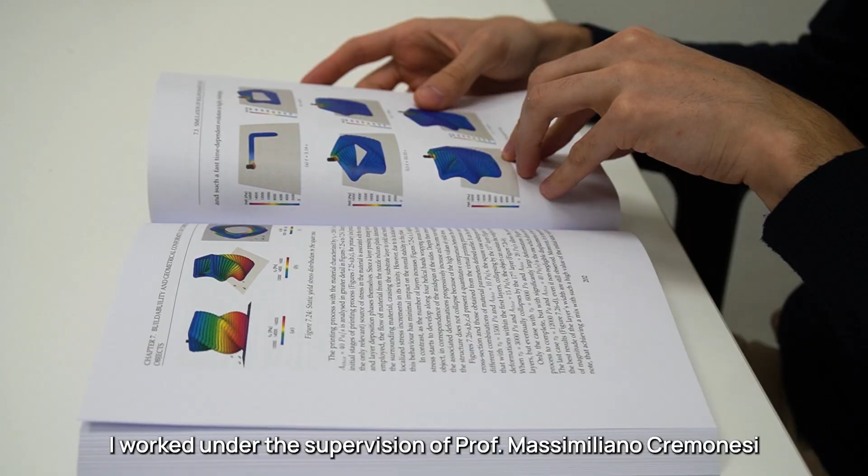Hello, I'm Giacomo Rizzieri and I recently obtained my PhD in structural, seismic and geotechnical engineering. During the past 3 years, I worked under the supervision of Professor Massimiliano Cremonesi and Professor Liberato Ferrara. My work lay at the intersection between computational mechanics and material modeling, and I've been working with both the research groups with the aim to develop new computational tools to simulate 3D printing with advanced materials.

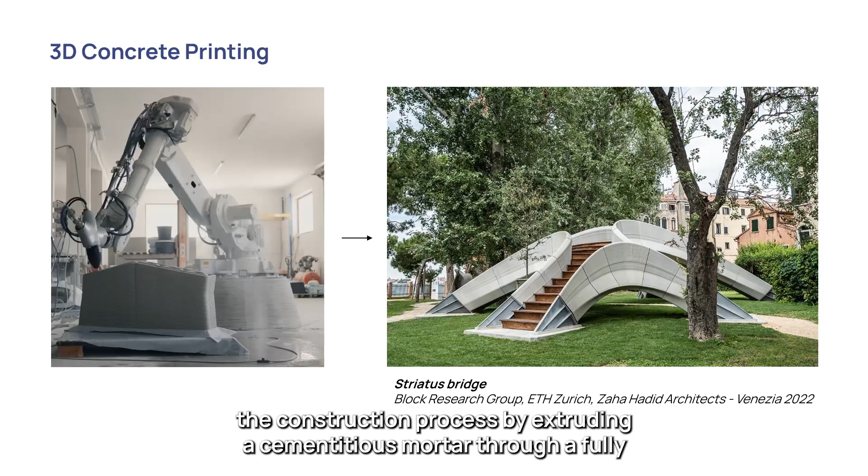Before entering into the details of my research, let me take a step back and explain to you what 3D concrete printing is. This is a very new technology which is used to optimize the construction process by extruding a cementitious mortar through a fully automated nozzle in order to create complex structures and objects. However, it is clear that this technology is very complex. For these reasons, it's necessary to develop adequate numerical and regulation tools to control it and optimize it.

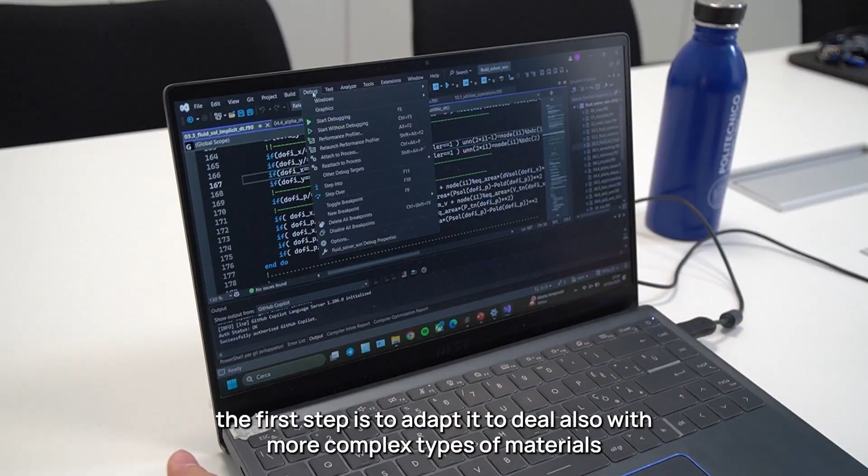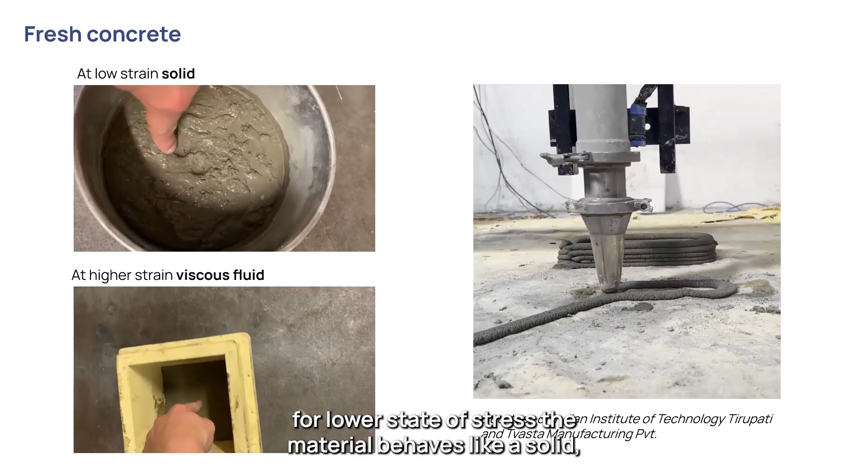In my research, I started from an already developed computational tool for fluid dynamics and I tried to extend it to simulate 3D concrete printing. The first step is to adapt it to deal also with more complex types of materials. In the case of fresh concrete, the behavior is dictated by the state of stress. For lower states of stress, the material behaves like a solid, while if it is subjected to vibrations, it will start to flow like a fluid.

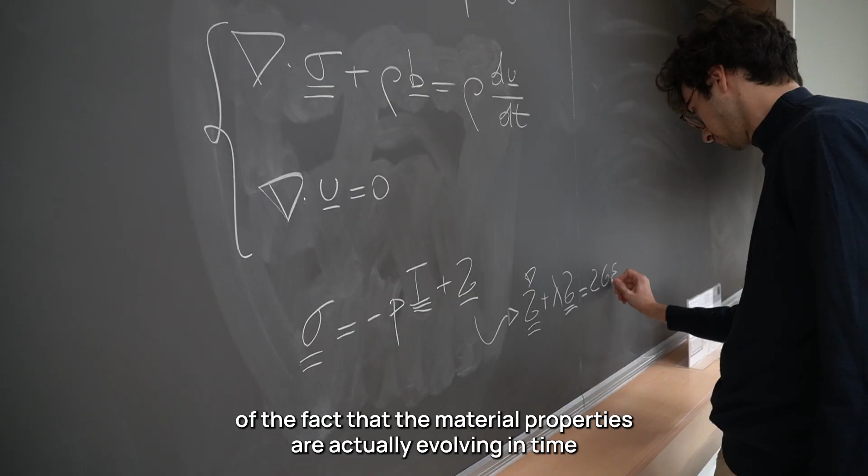Mathematically, this type of approach can be reproduced with the Bingham model. However, this is not the most accurate choice. In fact, the Bingham model is neglecting elasticity. For this reason, during my PhD, I tried to implement and develop also viscoelastic and elasto-viscoplastic materials. Additionally, I enhanced them, adding also the time dependency in order to take care of the fact that the material properties are actually evolving in time due to the hydration reaction of fresh concrete.

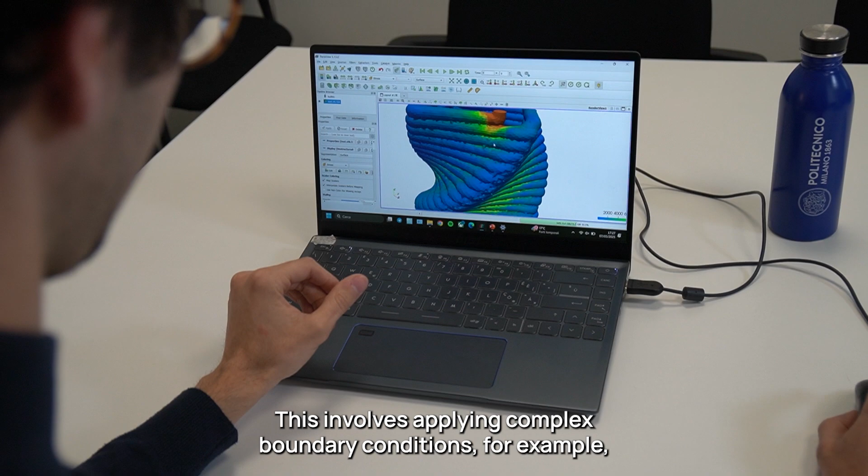In parallel, I started implementing a computational framework to represent the process of 3D printing from the numerical point of view. This involves applying complex boundary conditions, for example, to represent contact of the layer with the base plane or contact of multiple layers, one on top of the other. All this framework has been implemented in a Fortran environment and, combined with the material models I described before, is able to reproduce in a very accurate way the 3D printing process.

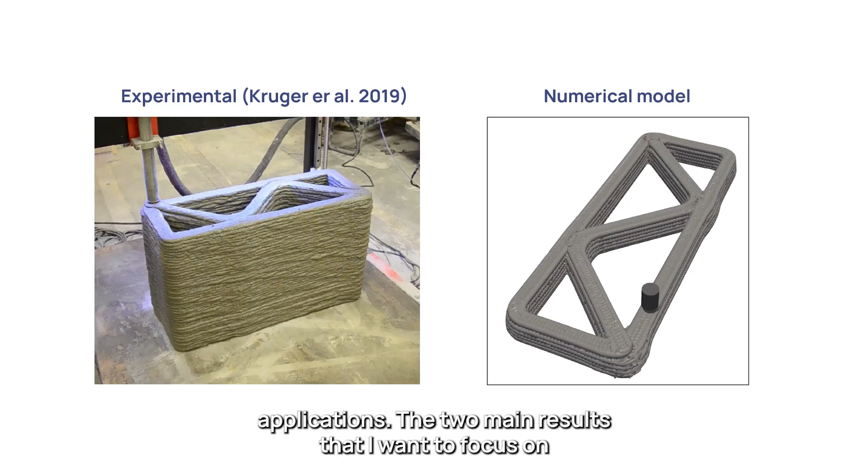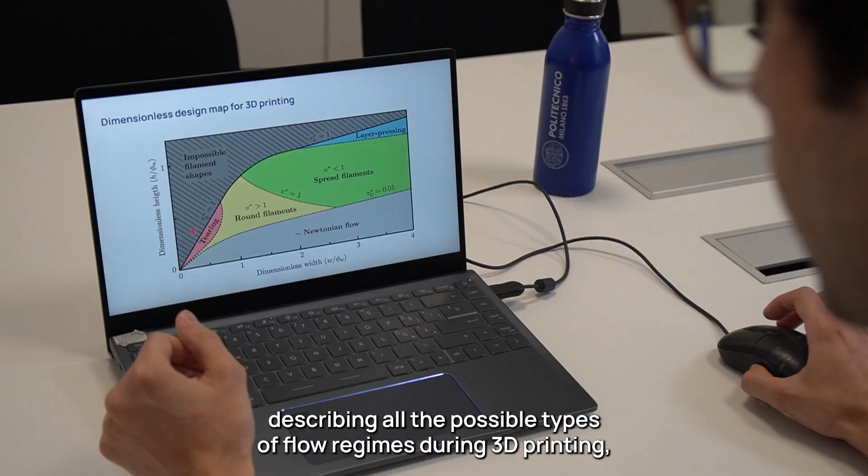I validated the framework by reproducing the printing scenarios obtained by experimental data and comparing cross-sections, obtaining very good results, and thus I decided that my model could be applied to more challenging applications. The two main results that I want to focus on here are that, by conducting a lot of simulations on single-layer filament printing, we were able to generate a map describing all the possible types of flow regimes during 3D printing and correlating them also to the possible cross-sections.

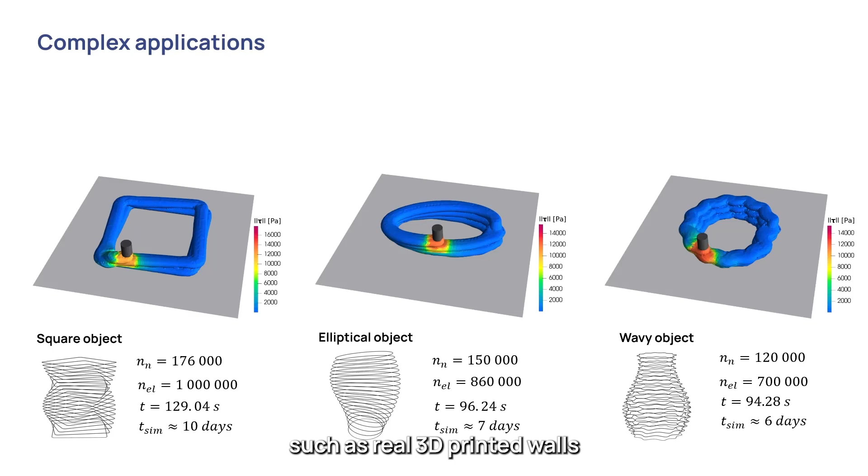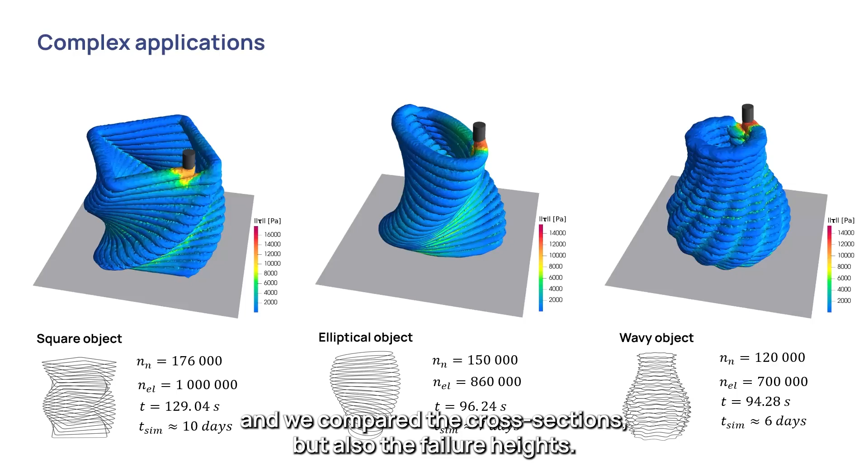Secondly, I tried to validate the framework also for multiple layer prints involving complex geometries such as real 3D printed walls or complex parametric objects. Also in this case, I was able to compare results with experimental data from a collaboration with TU Eindhoven, and we compared the cross-sections but also the failure heights. Basically, we compared after how many layers the objects that we were printing were supposed to collapse.